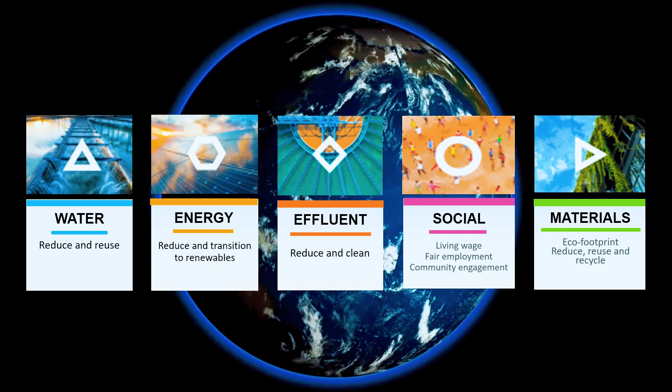Coats has always been committed to protecting the environment and practicing sustainability. As part of our global sustainability strategy, we have 5 priority areas to focus upon: water, energy, effluent, social and material. Amongst these 5 priorities, effluent management is the most critical one, considering its impact on the environment.

To manage the effluents, Coats' strategy is reduce and clean. Under reduce initiatives, Coats Bangladesh reduced over 30% of effluent generation against 2020, and over 40% against the year 2018. Under the clean strategy, we are confirming 100% safe water discharge to protect our environment.

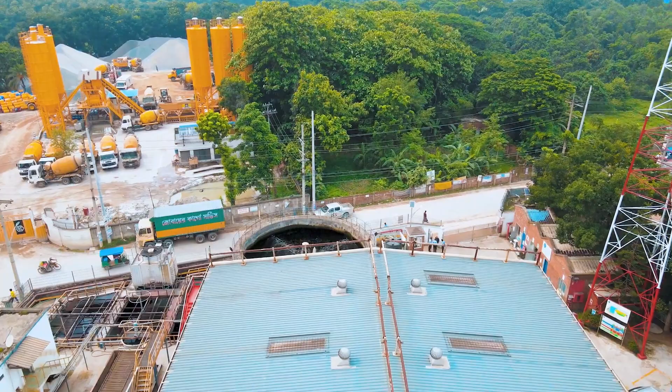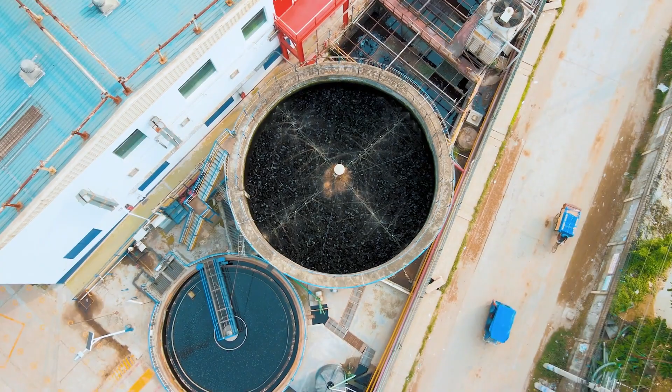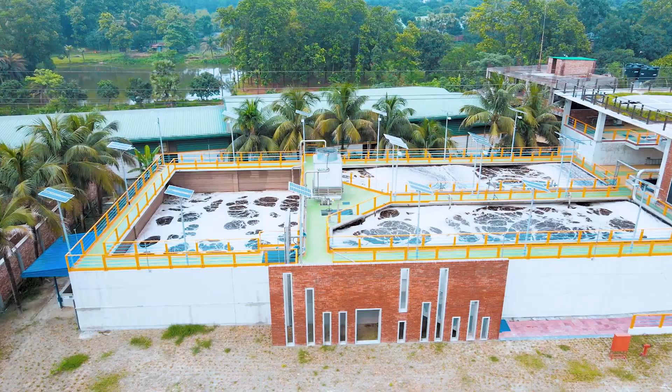The conventional ETP, which is a biochemical ETP, was established back in 2010. Though it confirms 100% compliance as per DOE limits, it has no recycling facility and generates a significant amount of sludge. To overcome the limitation of the current old ETP, Coats Bangladesh Ltd has established its new digitalized ETP with state-of-the-art technology for reusing wastewater.

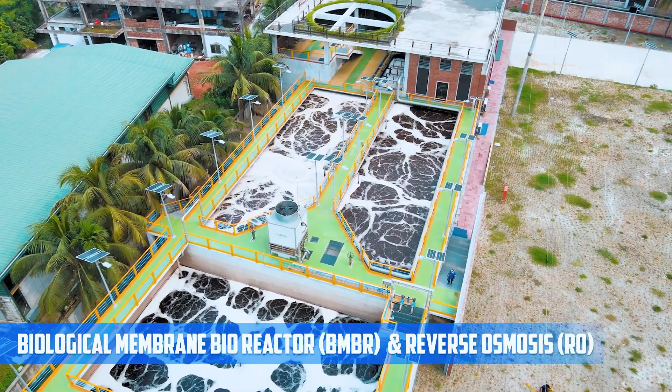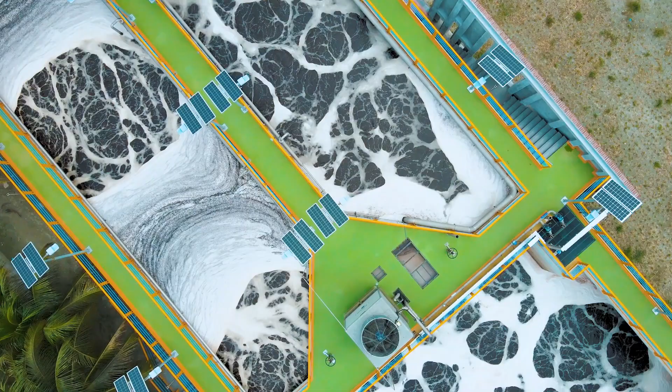The technology of the new ETP is based on biological membrane bioreactor and reverse osmosis, with a Xylem online critical parameter monitoring system. The capacity of this new ETP is 2100 meter cube per day, with 80% water recycling capacity, which is upgradable to zero liquid discharge option with evaporators in the future. The new ETP comprises of 4 major segments: biological operations, MBR filtration, RO operation, and reject treatment.

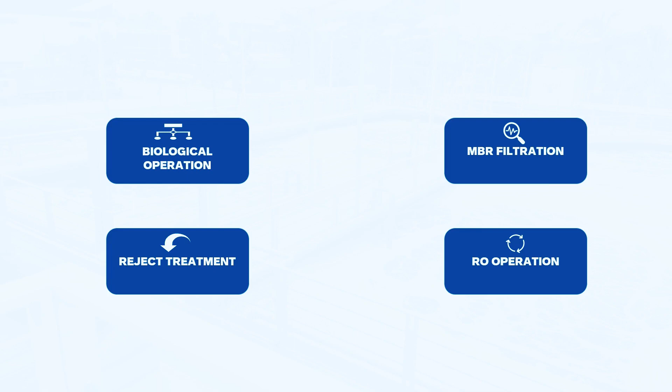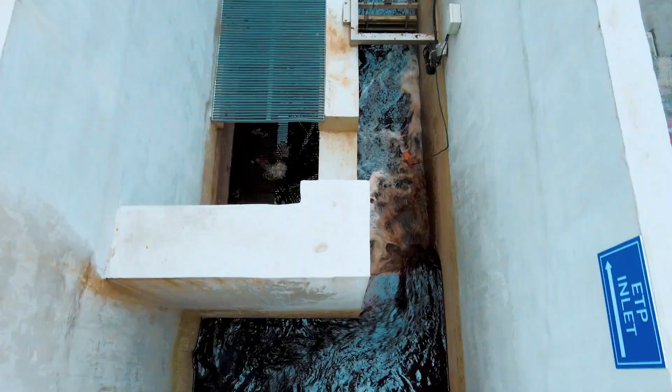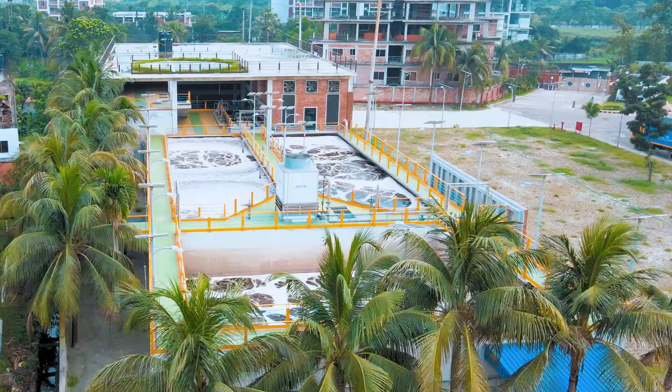All the effluents from dyeing machines directly enter into the screening tank through the hot blast tank, and the ETP process starts with the screening of effluents. For basic improvement of the water and proper bacteria growth, screened water is processed through an equalization tank, cooling tower, and oxidation tank. After biological operation, water overflows to the membrane bioreactor, called MBR, to produce RO feed.

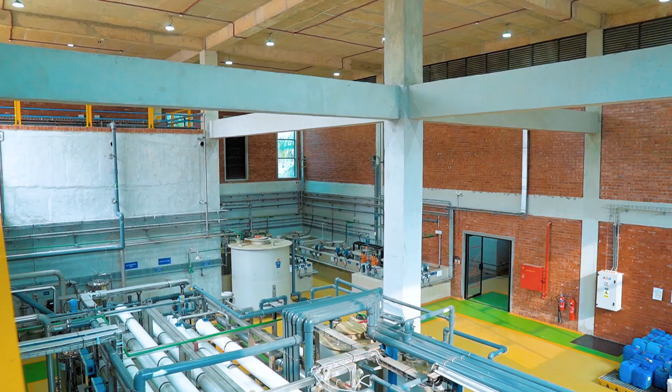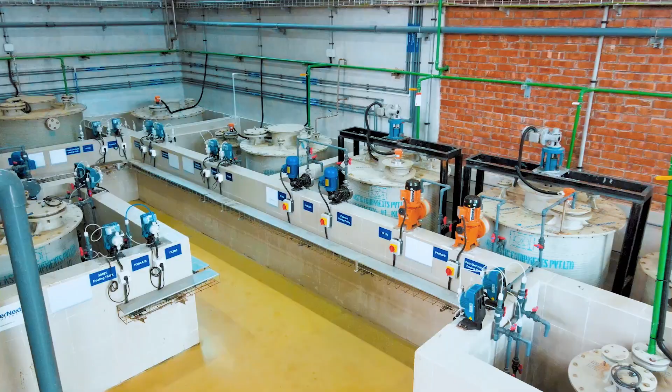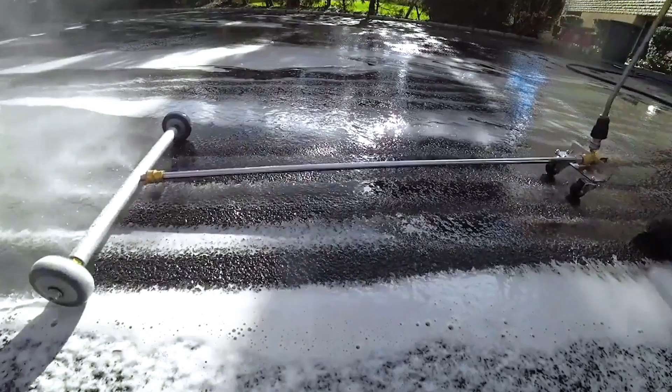During RO operation, 80% of treated water is recycled and sent back to the process, and the remaining 20% of RO rejected water is sent to the reject treatment area for chemical treatment. Before the final discharging, rejected water is treated in the reject treatment area. A part of the discharged water is used for toilet flushing, cleaning the road, and for gardening purposes. The remaining treated water is released to the City Corporation drainage system.

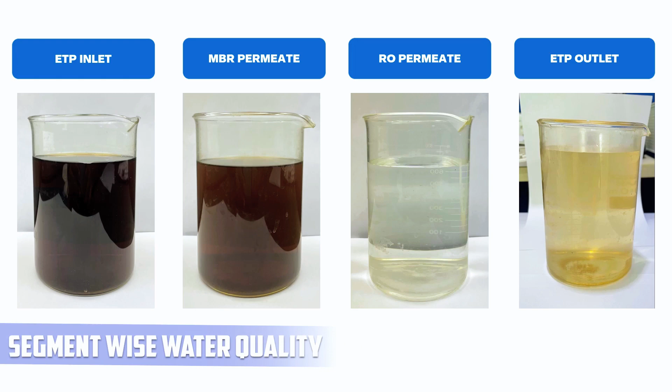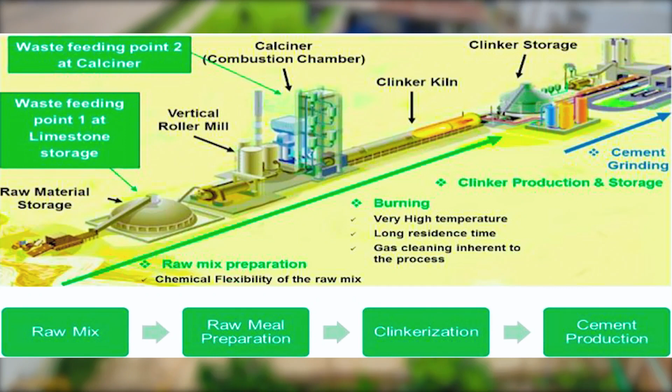Sludge is separated by filter press, dried in a sludge shed by using daylight, and then sent to a cement manufacturing company for co-processing, to ensure zero environmental impact from ETP sludge.

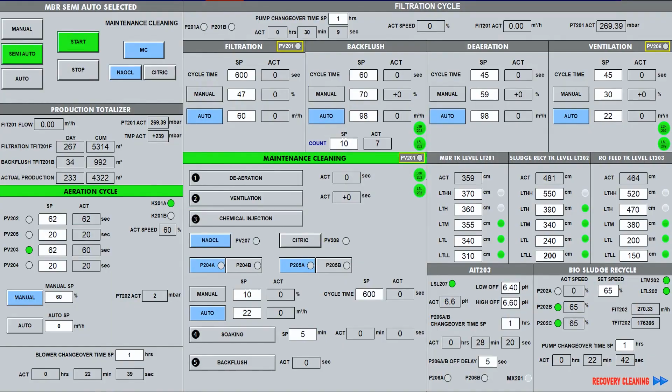The whole plant can be operated from a single computer window or remotely by supervisory control and data acquisition system, known as SCADA. Coats is one of the responsible organizations in Bangladesh to establish this type of ETP.

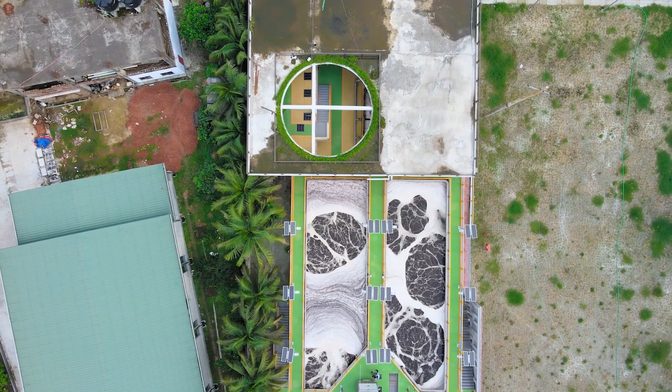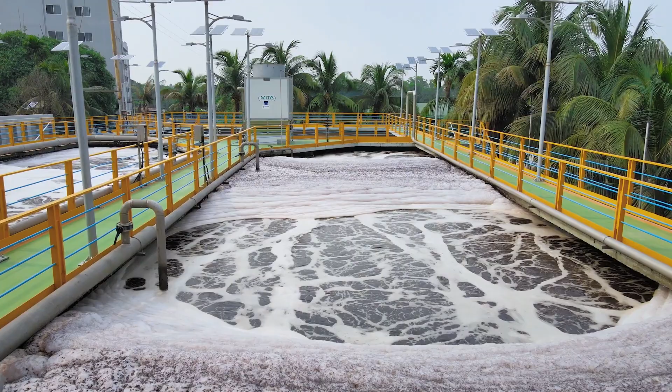We have only one Earth in this universe to live, so it is our collective responsibility to preserve and protect the environment to ensure people and nature thrive.